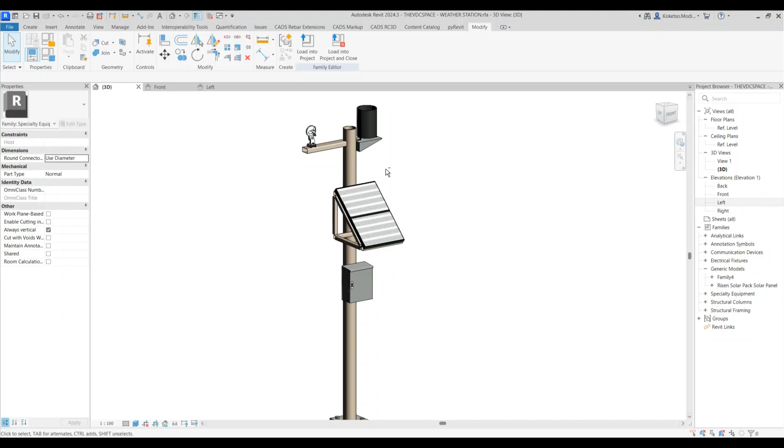Today we're going to be modeling a weather station for a solar PV farm in Revit. The level of detail, we're just going to keep simple, from 200 to 250, and we're just going to include some indicative elements of a weather station for a solar PV farm, such as the junction box, the waterproofing case, the solar panel itself, some mounting structural elements, and also the rain gauge and the weather sensor.

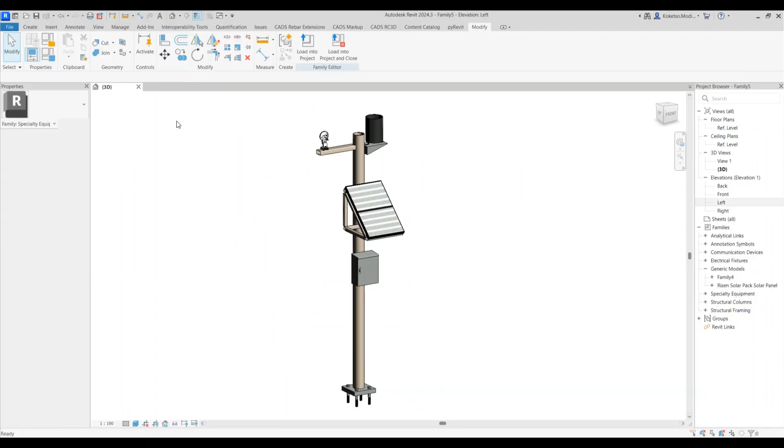Without further ado, let's start with our project. The first thing is I'm just going to create a new family. I'm going to go to new and say family, and then the template I'm going to go with is the metric specialty equipment. I'm going to say open, and let's just close this one down.

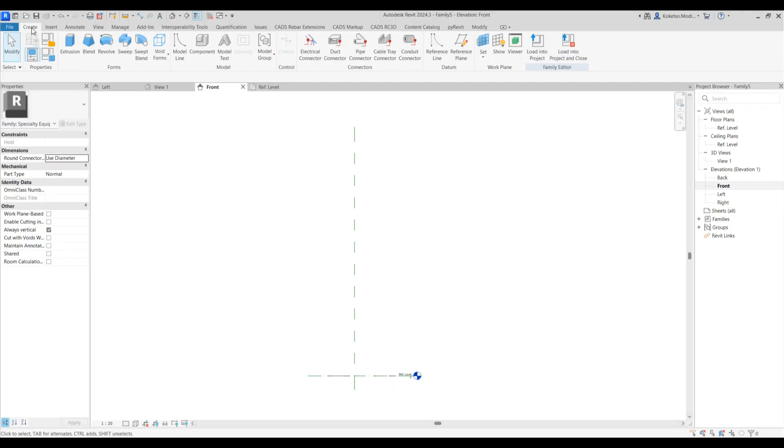The first thing is we're just going to establish our reference planes in order for me to establish where everything is going to be set. I'm going to go to the front elevation, extend this, and then lock it again. Go to create and say reference plane. You're going to place it right on top, then offset it by 1500, select it, copy it further up by 500, and then another one by 1000 millimeters.

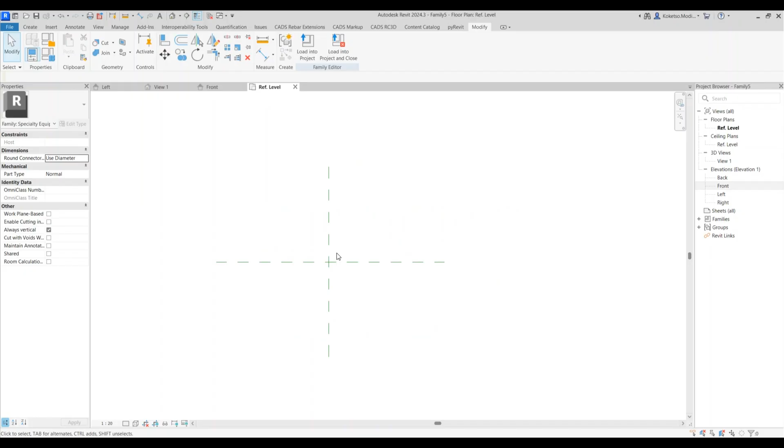The next thing is to nest families into this template. We're going to start with the structural components or the mounts. I'm going to go to insert and say load family, then go to metric library UK, then go to structural columns first, say steel British standards, then go to circular hollow section and say open. The size I'm going to go with is 139.7 by 5, and say okay.

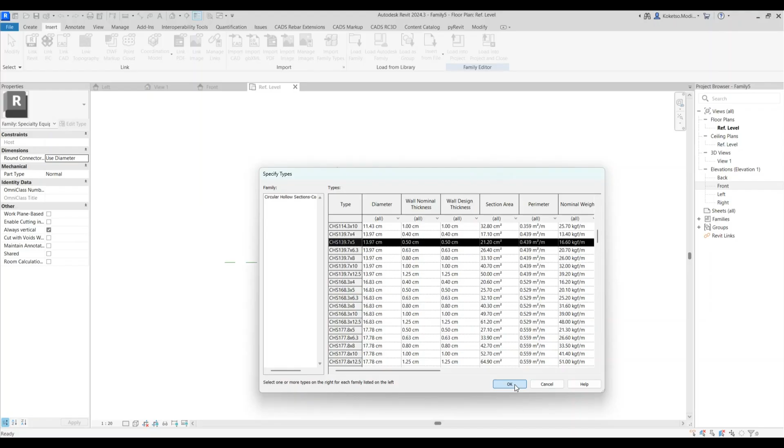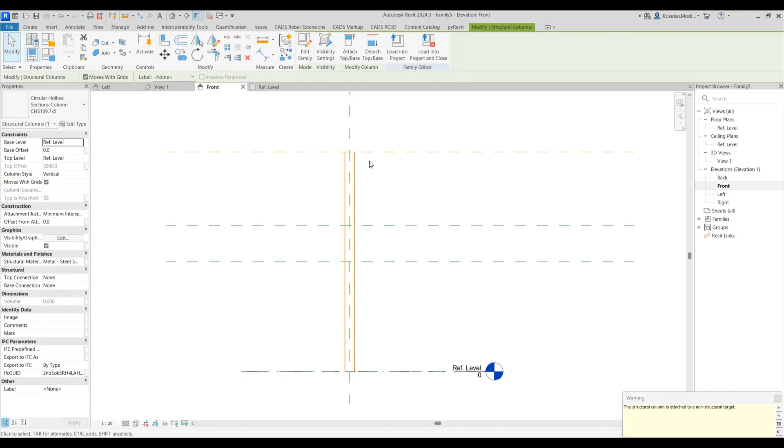Then you're going to go to create and say component, and place your column right there. Make sure you change your level of detail to fine so that you can see the thickness, the outer and the inner diameter. After this, go to the front elevation, change this to fine again, and select it. When you scroll up under modify column, select attach top or base. Make sure your constraints are set to top under attach column, then select your reference plane, and it's going to increase in size.

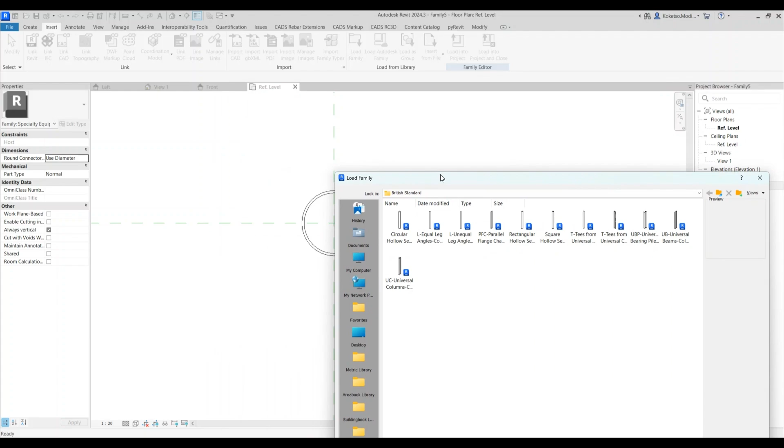After this, the next thing we're going to do is go to the reference level, and the next family I'm going to nest is the junction box. I'm going to go to load family, and by the way, I'm going to leave the link in the description so that you guys can download these families. I'm going to go to where I save my family.

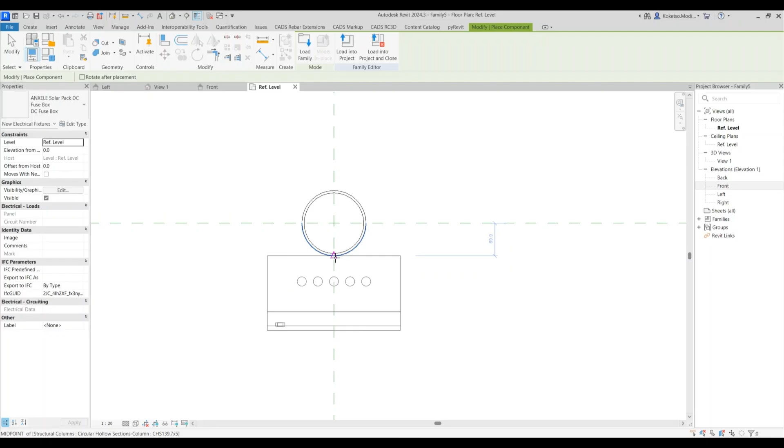There you go. I'm going to load in the family, go to create and say component, and then place it right there. After I place it, I'm going to go to the front elevation, and as you can see, this is where it's set. I'm going to move it right in the middle, and then move it towards this reference plane. If I open up the 3D view, this is what we have so far.

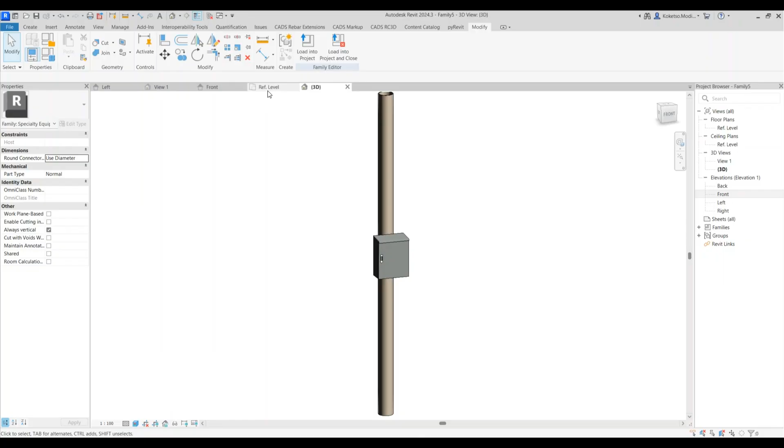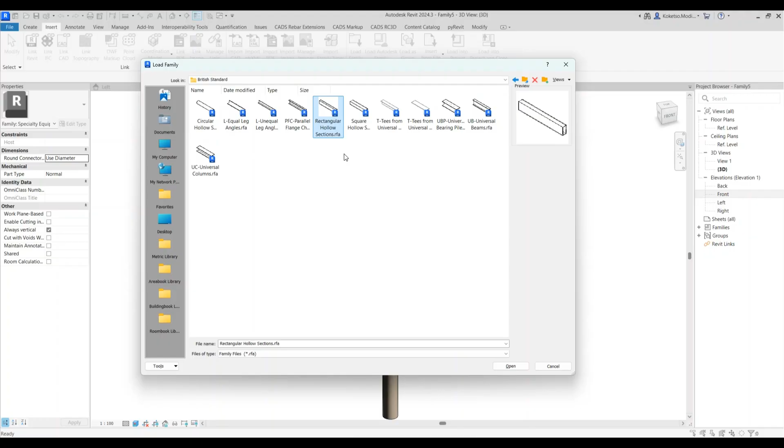The next thing is I'm going to place some structural framing which are going to act as a mount for our solar panel. In order to do that, I'm going to go to insert and say load family, then go to metric library UK content and say structural framing, go to steel, then British standards, and choose the square hollow section and say open. The size I'm going to go with is the smallest one, which is the 40 by 40 by 2.6, and say open.

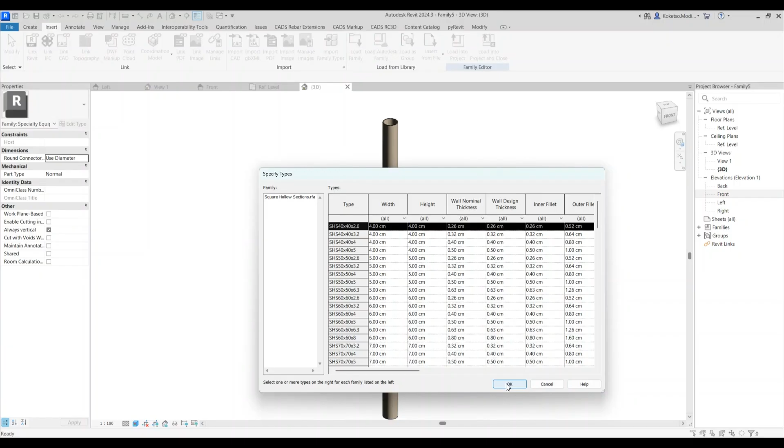So after this, I'm going to go to the left elevation, change this to fine again, and then this is where I'm going to establish my mount for my solar panel. I'm going to go to create and say component, and then I'm just going to start modeling from this point.

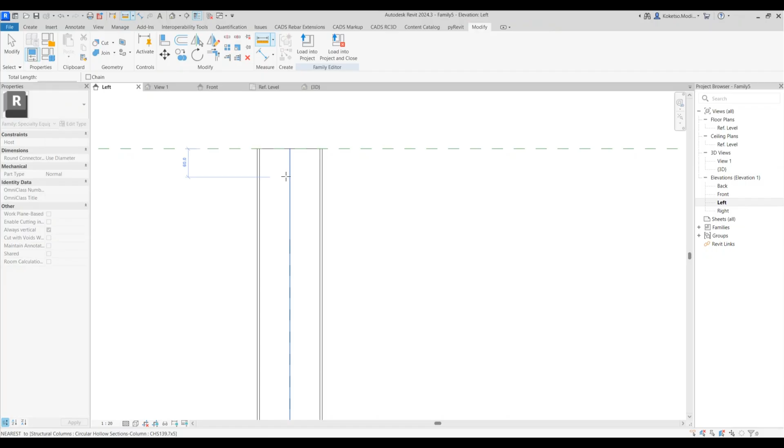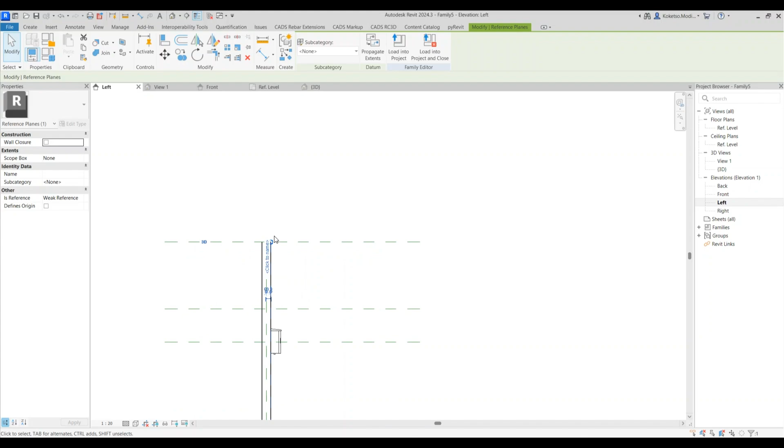So let's just measure this. If I use this, I'm going to measure from there until there. So it's 139.7. So what I'm going to do is establish my reference planes. I'm going to set this to 139.7 divided by 2, which is 69.9. And then I'm going to place some reference planes, which are going to make it easier for me to snap my structural framings for my solar panel mount.

Okay, so if I go to create again and say component, I'm going to start from this point, take it to the right by 500 millimeters, and then I'm going to place another one going to the top and make it 500 also. This one's supposed to be vertical. Why is it slanted? Okay, let's just align.

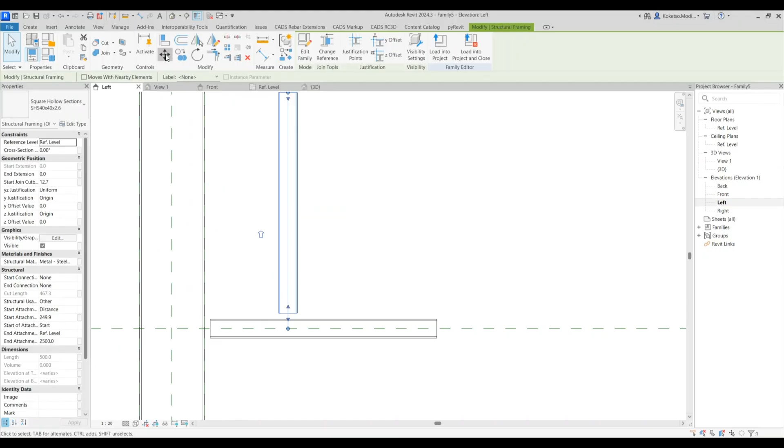So I'm going to align it like that and unjoin. Actually, let's do this. I'm going to place it randomly there and make it 500, select it, and then I'm just going to move it from this point towards that point. Okay, why is it slanted like that? Let's adjust it.

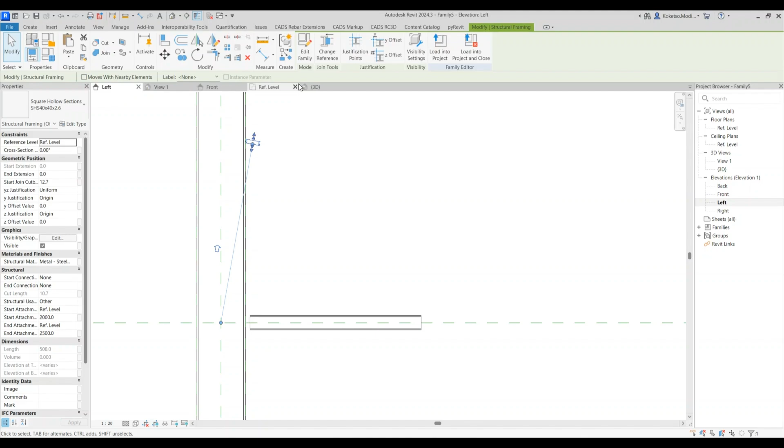Let's see, I'm going to move it again, and then it becomes okay, it's fine. I know what to do.

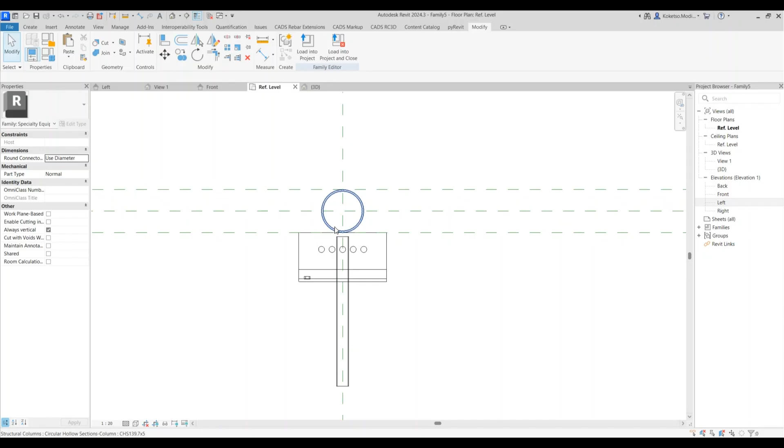So I'm just gonna go to the front, the left elevation, and then let's place another one which is diagonal. So I'm gonna start from this point. Actually, let's go to, I'm gonna place some reference planes.

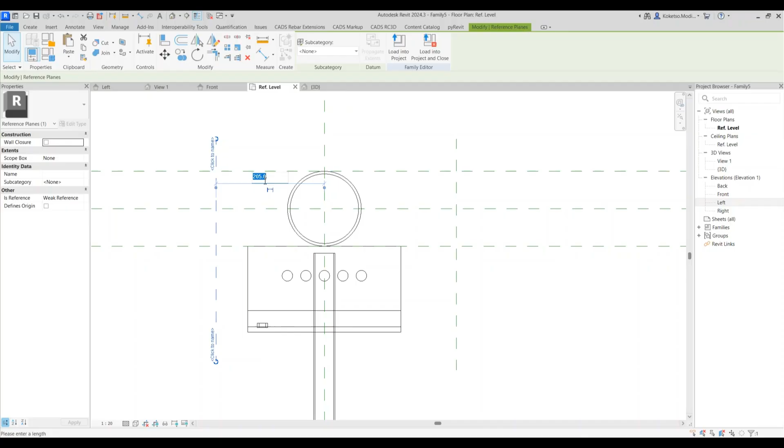So I'm on the reference level on the floor plan. I'm gonna place reference planes, one on each side. And then this one I'm gonna offset by, let's say 250, and then another one by 250. Okay, so I'm gonna name this one L, and then this one I'm gonna rename it R.

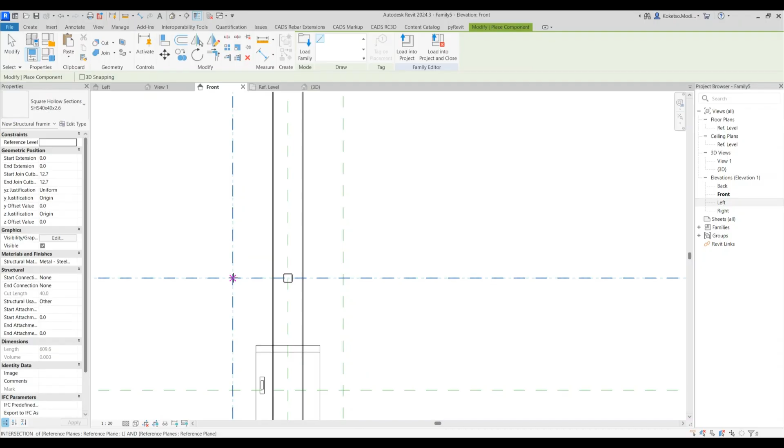So if I go to the front elevation, I'm gonna say create and say component, and then this is my L. So I'm gonna place this structural framing at 500, and then another one by 500 this side.

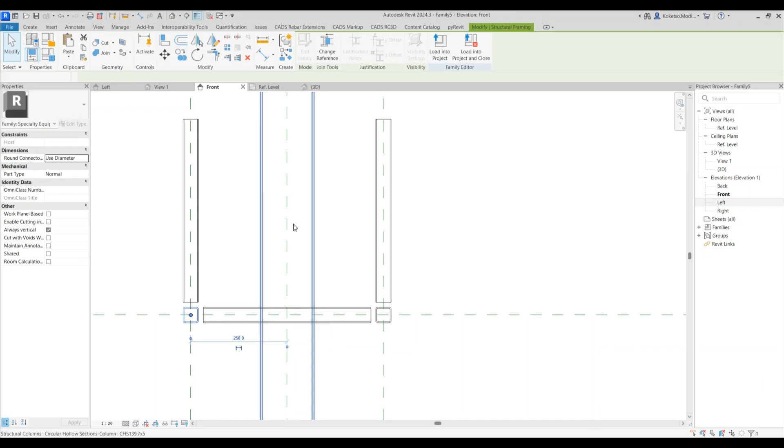I'm gonna place another one like that, and then I'm gonna move this one towards this reference plane and join, and then while it's still selected, mirror it towards the other side. So this is essentially how it looks.

So this one, I'm gonna have to nudge it. I'm gonna go to the left elevation. Let's select these three. So I'm gonna go to the left, and then I'm just gonna nudge it towards that point. Perfect. So this is how it looks.

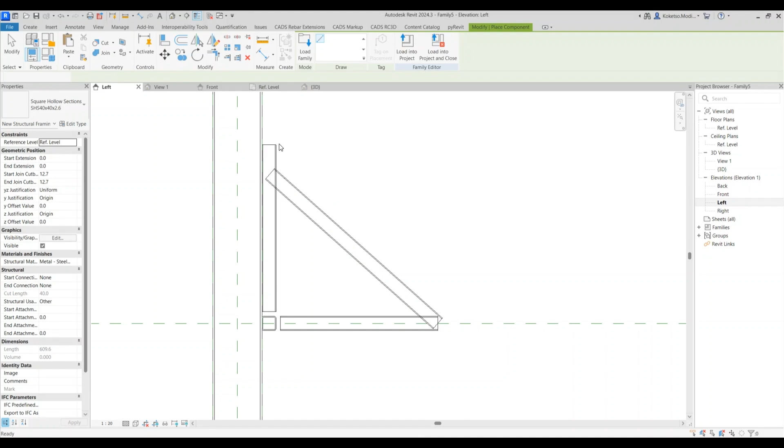So I'm going to go back to the left elevation and say create and say component. I'm going to place a diagonal one, which is going to be running like that. No, undo, from that point and then towards that point. Okay, so let's see how it looks.

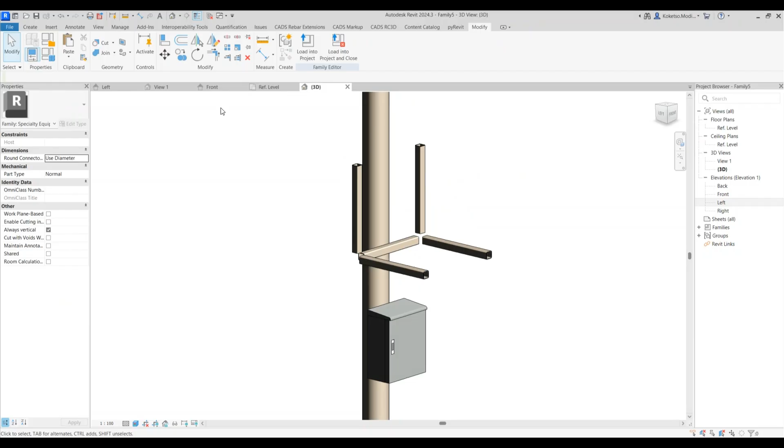I'm going to select it, go to the front elevation, and then obviously I'm just going to move it towards this point and join it, and then mirror it towards the other side, and then it's going to refine itself like this. So let me just remove this, go to the left and say component.

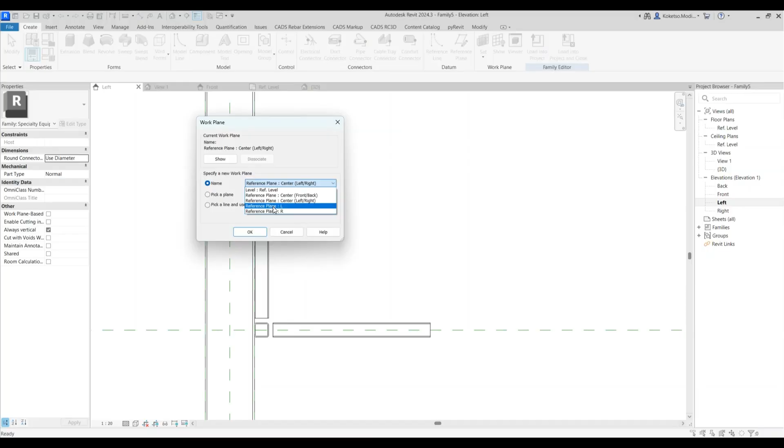And I'm going to set my reference, so it's going to reference, okay. Let's say set. I'm going to set my reference plane to reference plane L and say OK, component, and then I'm just going to place it like that. Okay, perfect. So I'm going to select it, go to the front elevation, and then let's mirror this towards the other side. So if I go to 3D view, this is how it looks.

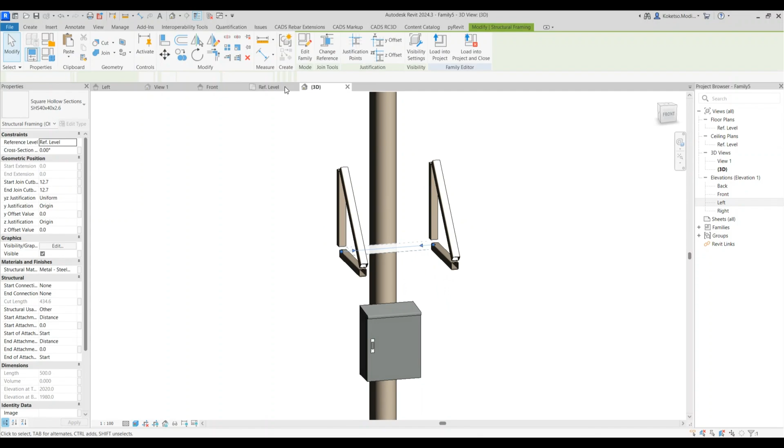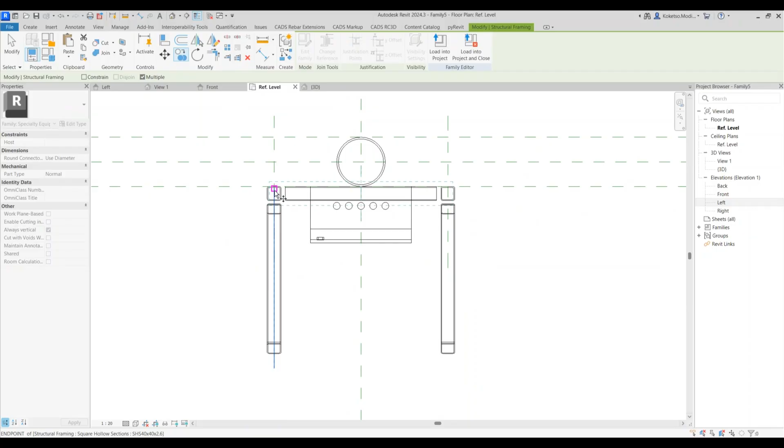Okay, so this one, I'm just going to copy, select it, go to the front elevation, and then I'm just going to copy it towards the top and place it like that. Okay, so after this, this one I'm going to select, go to the reference level, and then I'm just going to copy from this point and then towards that point.

All right, so the next thing is to place our solar panel. For me, I'm just going to load in the one I downloaded from BIMobject. I'll leave a link in the description, like I said, and I'm just going to refine this one a little bit.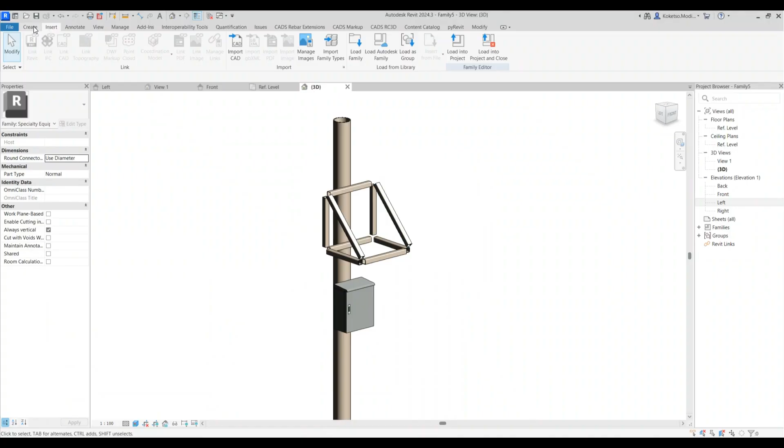If I go to component, I'm just gonna randomly place it, select it, and say edit family. If I go to the reference level, I'm gonna assign the parameters that the owner has assigned towards the dimension. So this is gonna be depth, and this one is gonna be width. No, actually this one is width, and this one is depth.

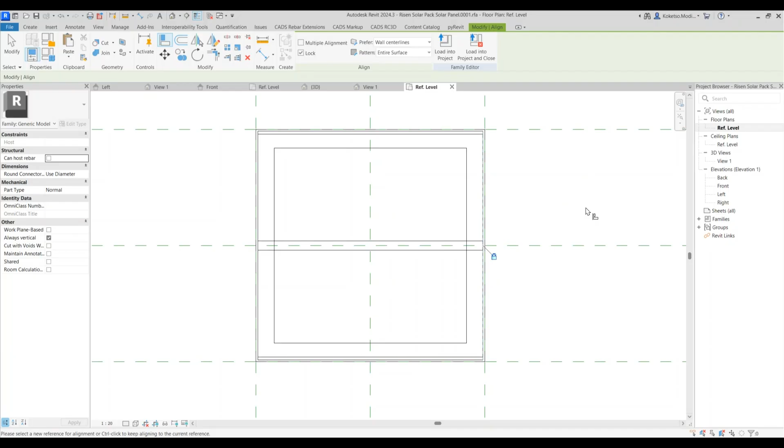I'm just gonna change the width to 500, press enter, and then the depth also to 500 and press enter. As you can see the width hasn't changed, so I'm gonna press AL for align. I'm gonna align it towards the inside, align this one first, then align this extrusion second. If I open up the 3D, this is how it looks.

The next thing is I'm just gonna say work plane based, check this, and then uncheck always vertical, and then I'm just gonna load it back into our family.

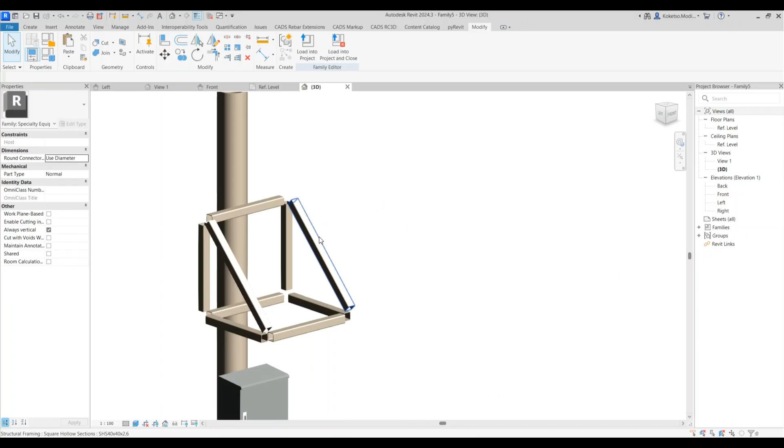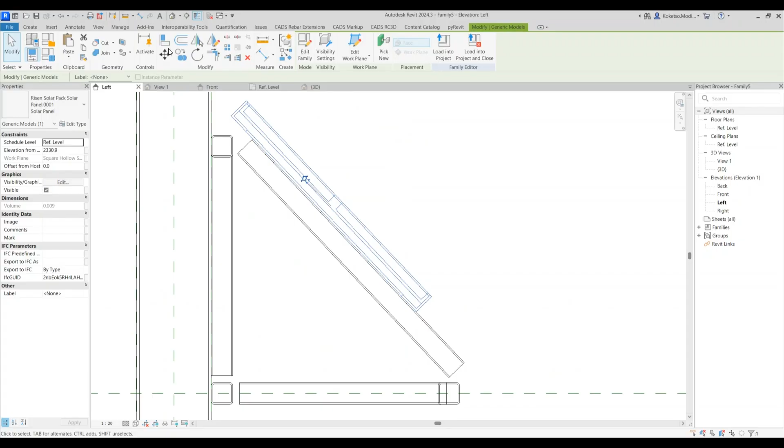I'm gonna deselect it and say create component, make sure placement is set to place on face, then select this face of your structural framing. Place it like that, and when you go to the front elevation, you can manually adjust it. Then in the left elevation, you can perfectly adjust it right in the middle. So this is how it looks.

So the next thing is I'm just gonna create a base plate. I'm gonna go to the floor plan, the reference level, go to create and say extrusion, and place a random rectangle like this.

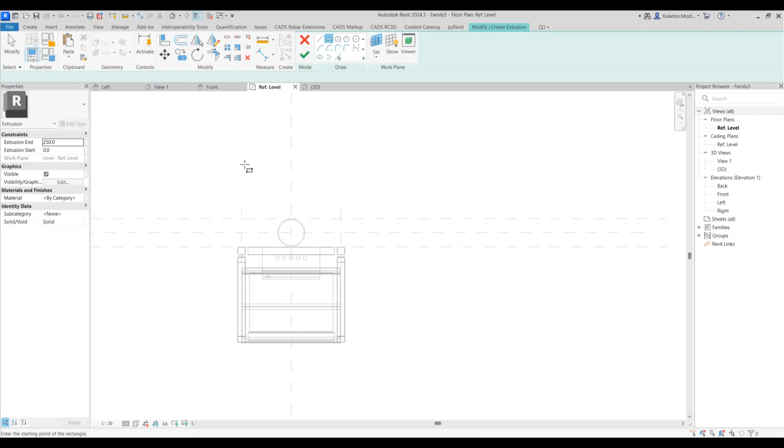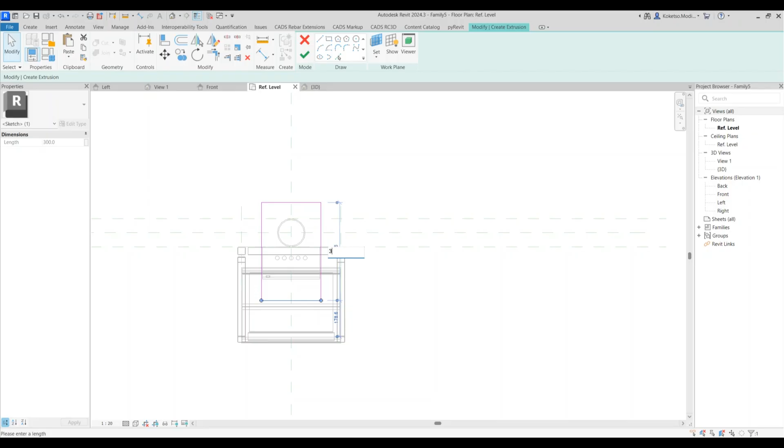This rectangle, I'm just gonna offset it perfectly from each side. On this side, I'm gonna make it 150, so essentially it's gonna be 300 by 300. This one, I'm gonna make it 150, and let's make it 300. Say finish, go to the front elevation, and drag this down, place it like that. Then the thickness of this, I'm just gonna make it 10.

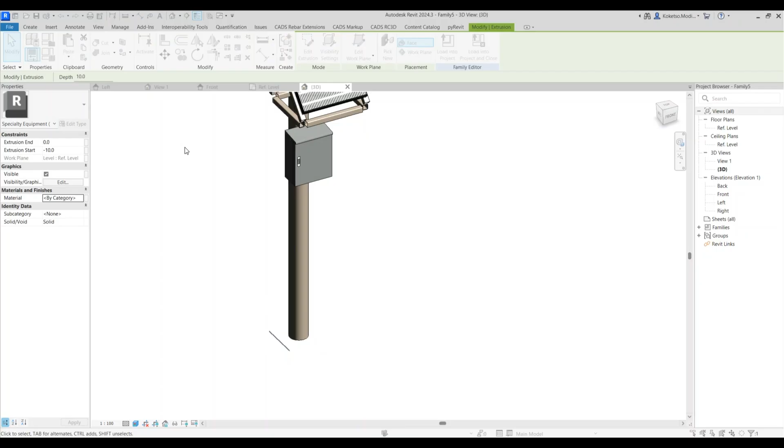Go to the 3D view. The next thing is I'm just gonna place some bolts, but before that, let's assign a material. I'm just gonna make this one steel or metal. I'll go with metal and say apply, and then okay.

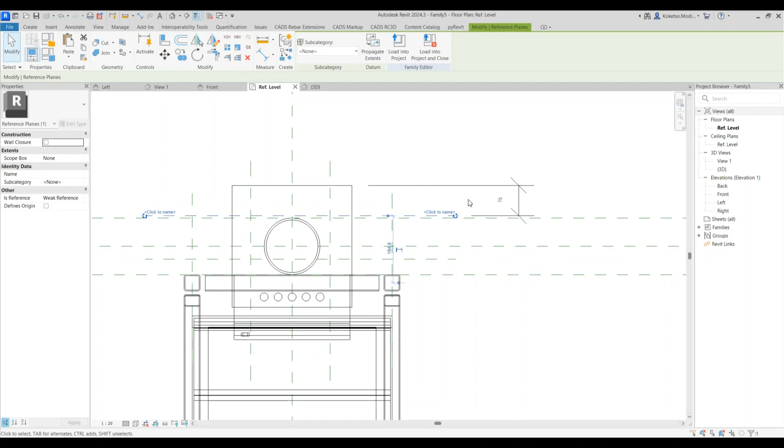The next thing, I'm just going to load in some bolts that we created in previous tutorials. But before that, let's place some reference planes like that, so it's easier to place the bolts. Let's offset this one from the outside by, let's see, 75 - no, actually 50 is fine. And then this one also, let's offset it by 50.

I'm just gonna remove these ones because we're no longer using them. This one I'm gonna offset by 50, and then this side also, I'm gonna offset by 50.

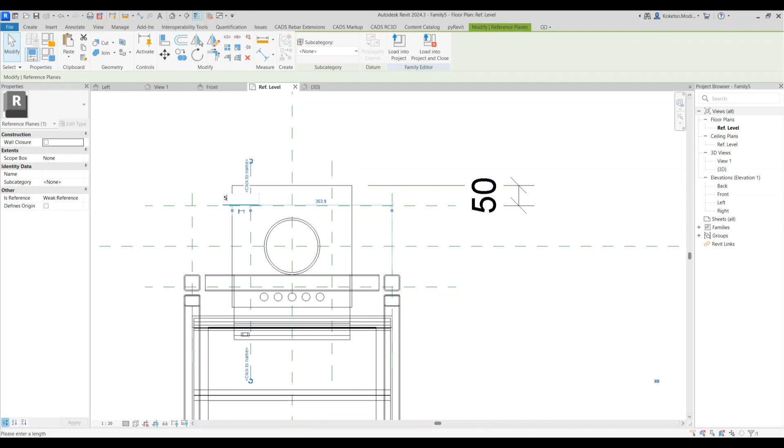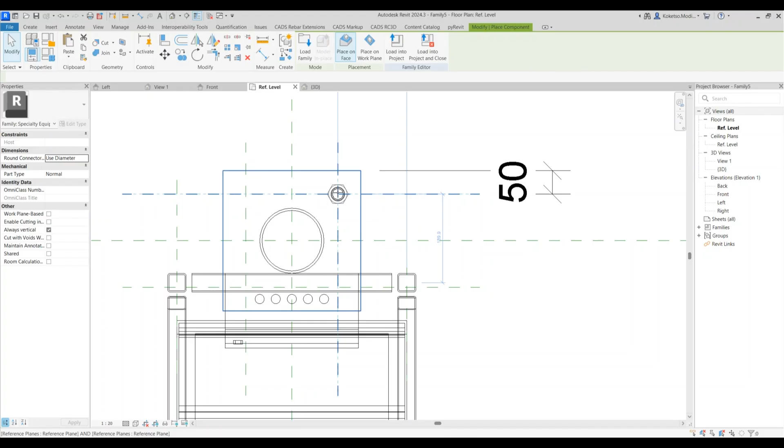The next thing is I'm just gonna load in my bolt family that I've created. Remember the tutorial of the elastomeric bearing - just refer to that tutorial, that's where you can generate that bolt family. After opening it, I'm gonna go to component and place my bolts where the reference planes intersect. After that, I'm just gonna select all of them and nudge it down, placing it perfectly on top of our base plate.

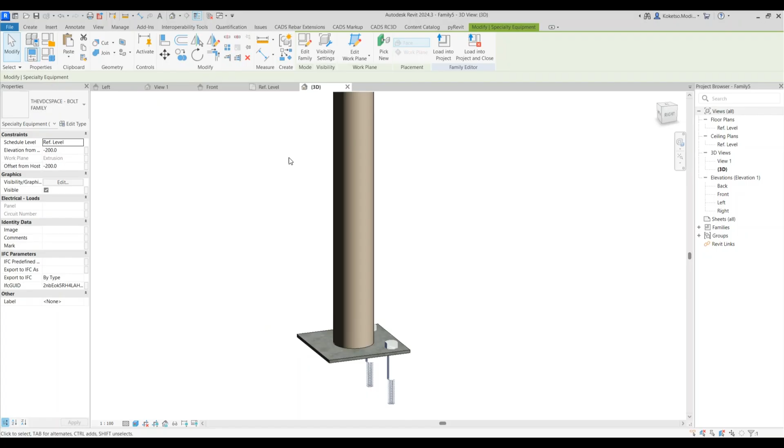These ones, I'm sure they're at the top. Let's select them and then nudge it perfectly like that. All right, so this is how it looks.

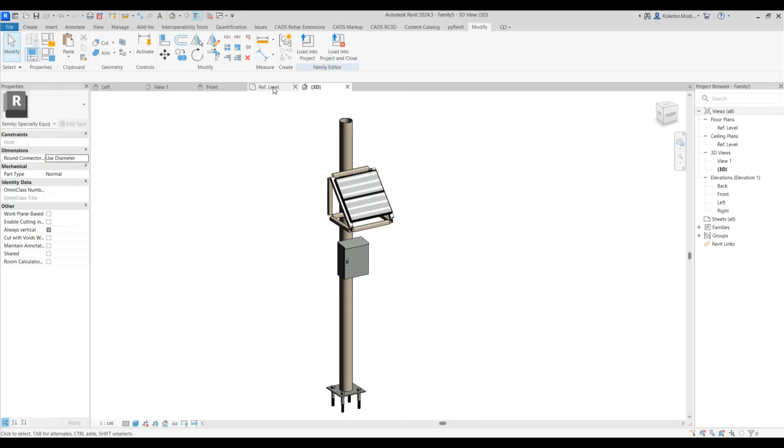So the next thing is we're gonna place another structural framing at the top. I'm gonna go to Insert and say Load Family, go to the metric library, UK contents, and say structural framing, steel, British standards, rectangular hollow section, and say Open.

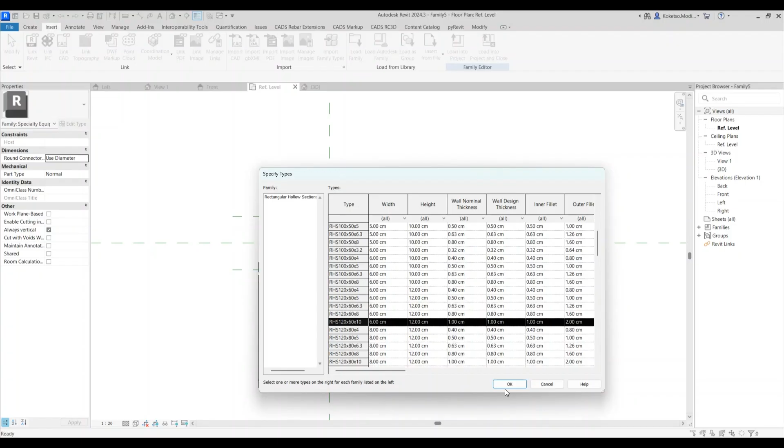The size I'm gonna go with for this one is 120 by 60 by 10, and say Open. Create and say component. I'm just gonna place it right on this side and then offset it by 500 mils. Go to the 3D view, and then if I select it, I'm gonna go to the cross section and change the cross section to 90.

And then I'm gonna select it, go to the reference level, and then I'm just gonna nudge it back to its position perfectly like that.

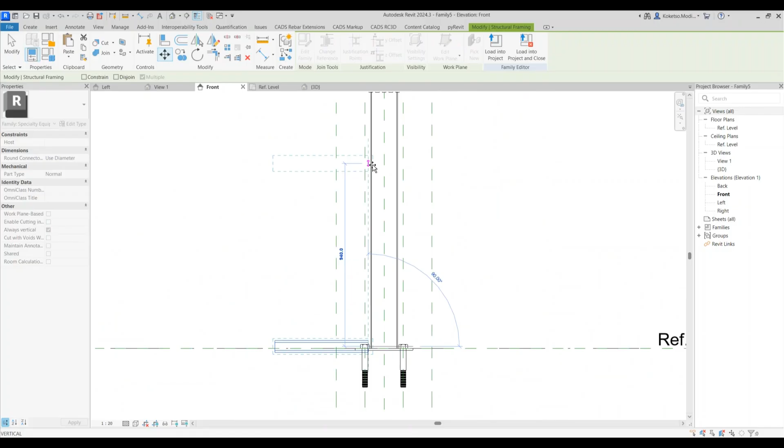And then if you go to the front elevation, because it's a beam, you're going to have to adjust it. So I'm going to punch in random numbers for the start level offset and end level offset so that I can just move it freely towards the correct position at the top. So I'm going to place it like that.

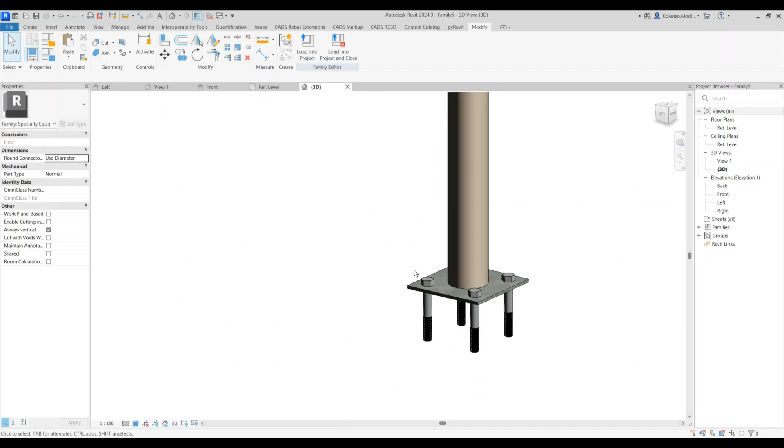And then I'm just going to move this by another 100 mils. And then this one, I think it's fine right there. So the next thing is let's just close this down and then open it again.

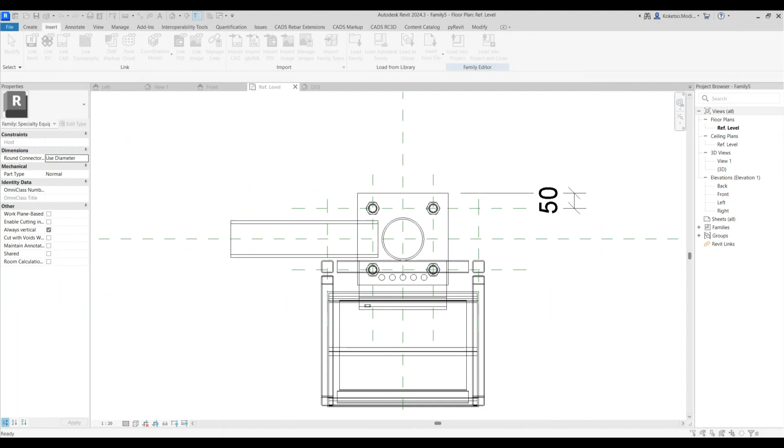So the next stage is to place our weather sensor. This one also I've got it from BIM objects, so I'll leave the link in the description so that you guys can download that. It's the weather sensor. I'm gonna say Open.

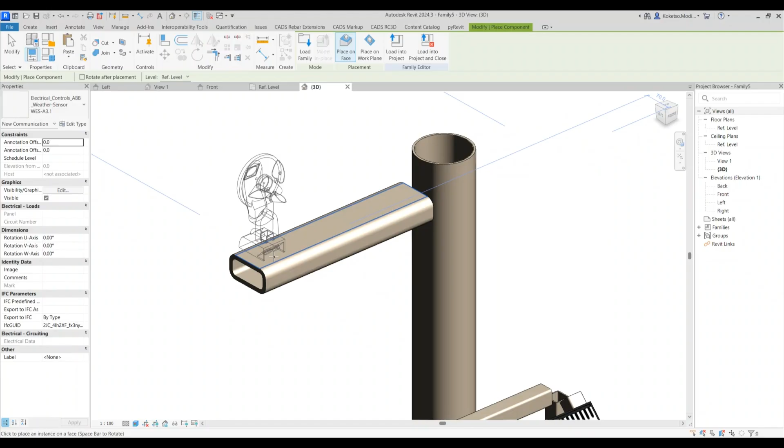So I'm gonna go to create and say component. And then this is also face based, so if I scroll and hover over the top of this structural framing, it's gonna allow me to place it on top like that. So I'm gonna place it like that. And if you go to the left elevation, you can just nudge it perfectly so that it can be placed perfectly on top of your structural framing.

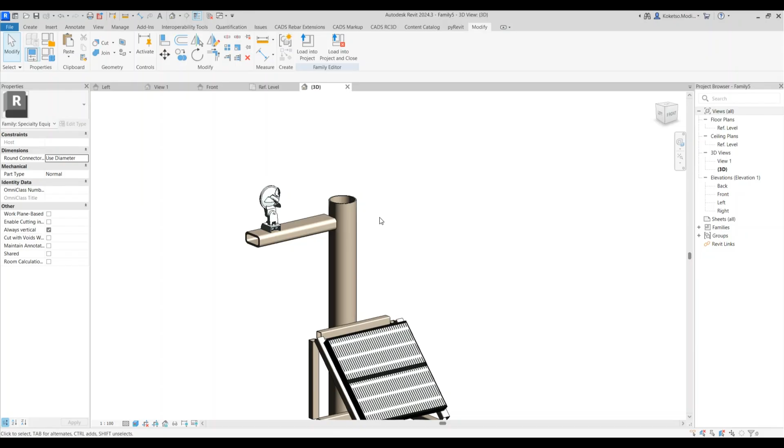So the next step is to create a steel plate so that you can place your rain gauge on top of that. But for that, I'm not gonna create it as a separate family, I'm just gonna create it right inside this template. So before that, let's just create a rain gauge, a simple one, as a separate family.

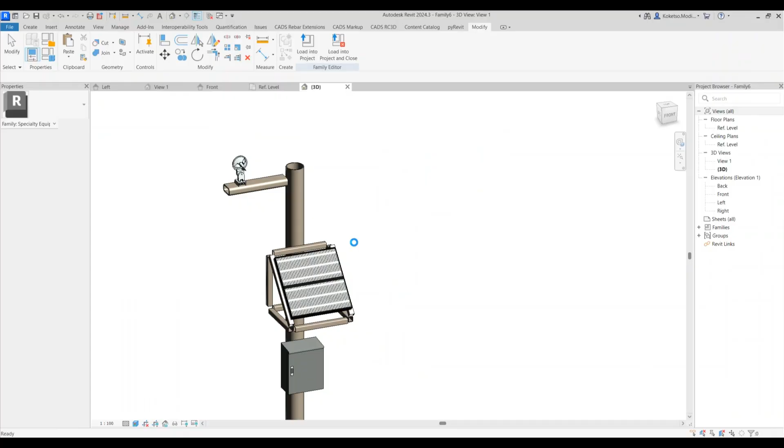I'm gonna go to Family, and actually I'm gonna create the plates inside this family also. So for our rain gauge, I'm gonna say extrusion circle. So I'm gonna place it right in the middle.

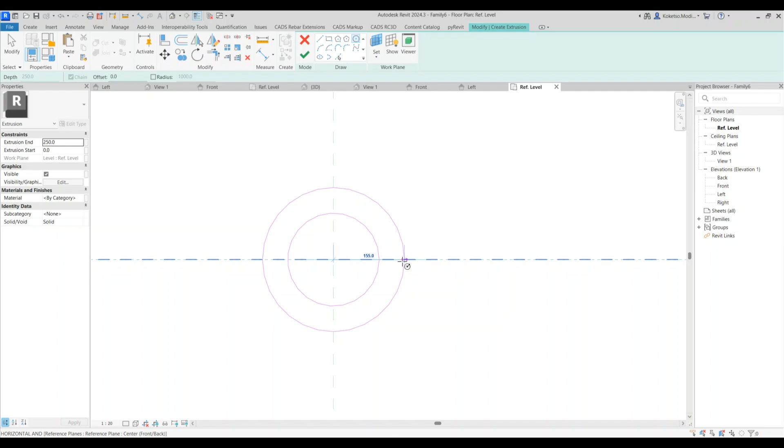And then the size of this, I'm just gonna make it 100, and then the outer diameter I'm gonna make it 105. And then I'm gonna say finish, go to the front elevation. And then I'm just gonna drag this towards the top. And then I'm just gonna measure this gap, select the bottom of this so that I can nudge it and adjust it and make it 30.

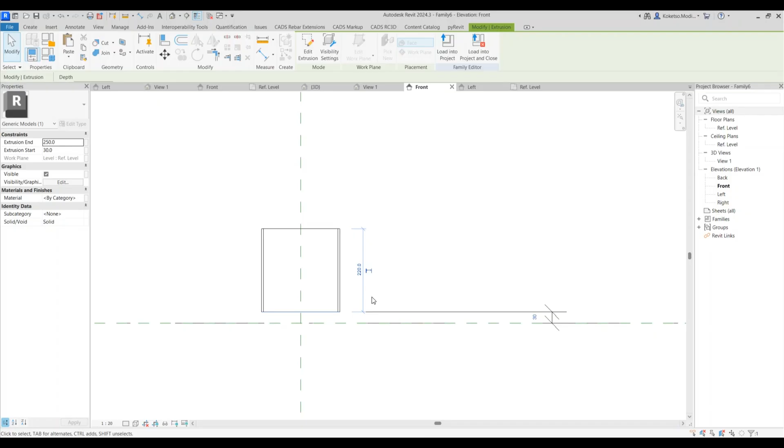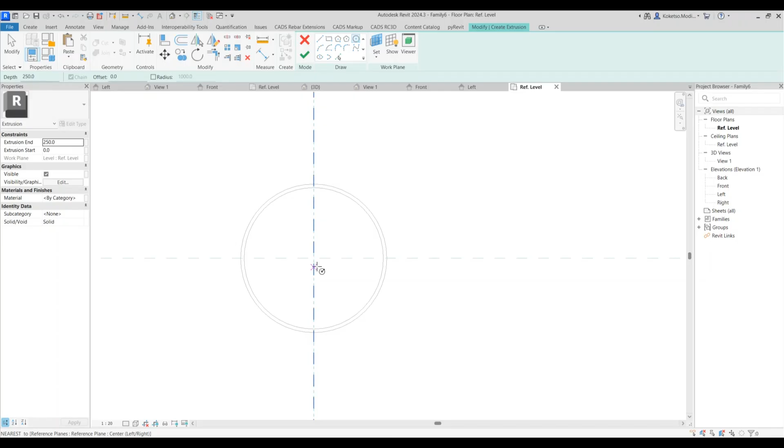So the entire depth of this, I'm gonna make it 250, and then remove these. So I'm just gonna add the base of this steel cylinder. I'm gonna go to extrusion and then place another one right in the middle like that, which is gonna be a solid, and say finish, go to the front elevation.

And then I'm just gonna drag this towards the bottom. So the thickness, I'm gonna make it 10. And then I'm just gonna drag this towards the top of this. So let's just join the geometry. Yeah, that's perfect. So the next thing is to create some supports which are going to be supporting this small little cylindrical shape.

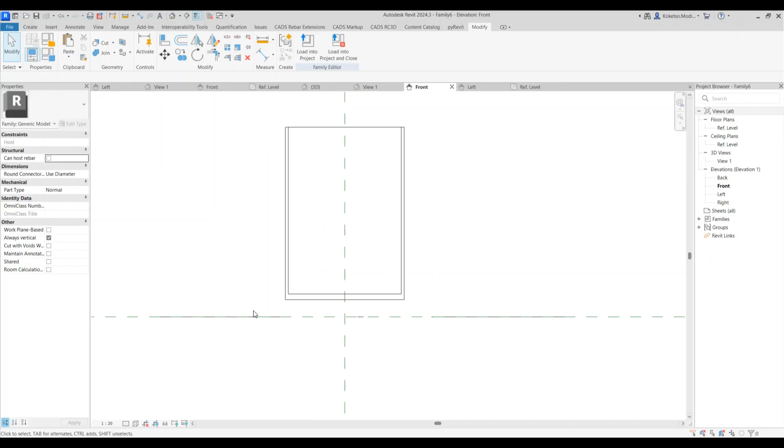So I'm going to go to sweep and say sketch path. I'm going to offset it by 80, place it like that, at an L shape.

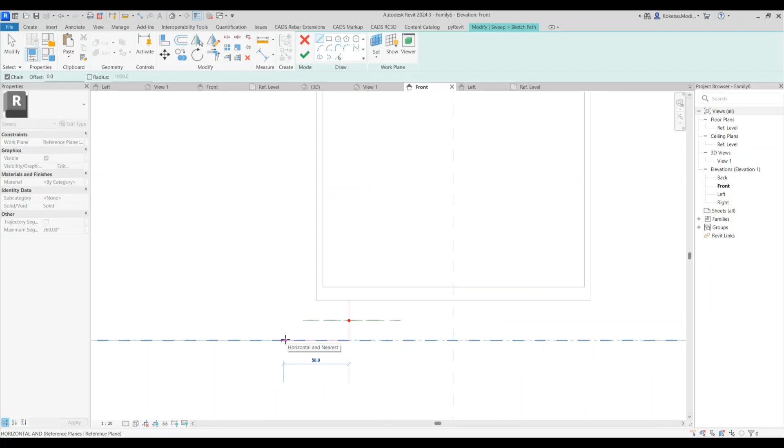So it's going to be going down by 30 and then to the left by 50 mils. Say finish, edit profile, go to the reference level of the floor plan, and then you're going to place a rectangle like that. And then this rectangle, you're going to offset to make it 10 millimeter thickness, and then on each side offset by 25, and then it's going to be 50.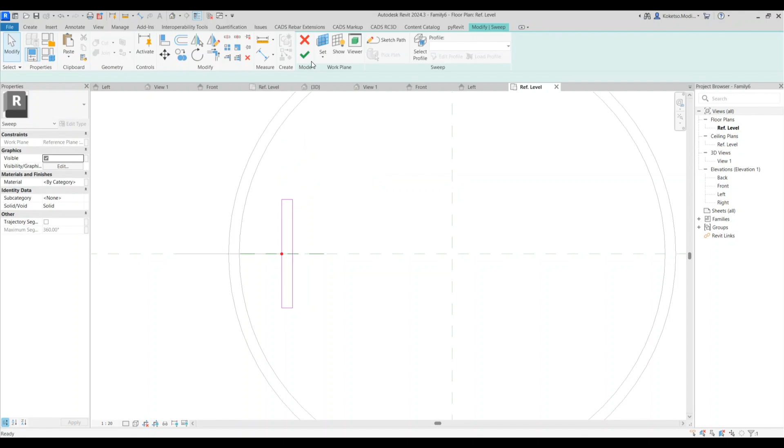Okay, let's reduce the thickness and make it 5. Say finish, finish, open up the 3D view, and this is how it looks.

So I'm going to select it, go to the front elevation, and then mirror it towards the other side. After this, I'm going to go to the 3D view, select all of these, and then just change the material to aluminum, load in aluminum, apply, and then okay.

So after this, I'm gonna go to the reference level, and then I'm just gonna add a plate extrusion. I'm gonna place my plate like that, and then from that point, I'm gonna offset by 50.

Actually, let's make it 150, that's fine. And then from there, let's make it, I think 315 is fine.

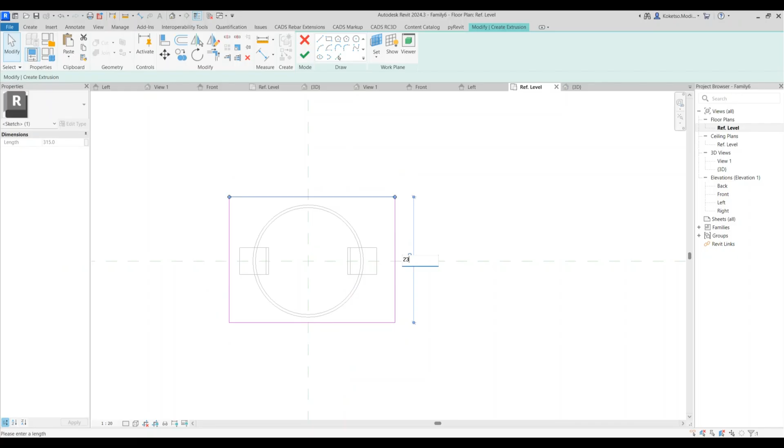And then I'm just gonna nudge this one. Let's make it 115 this side, it's fine. And then it's gonna be 230 in total. Right, so I'm gonna say finish.

Go to the front elevation. I'm gonna drag this down towards the bottom of our supports. And then the thickness of this, I'm just gonna make it 10. And then I'm gonna place another one.

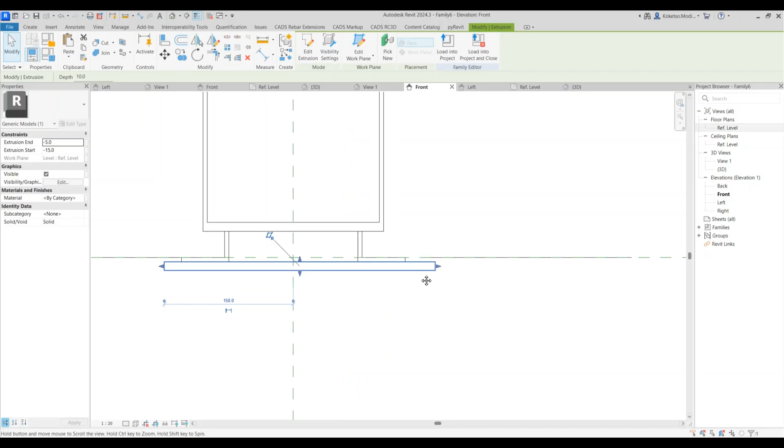Actually, let's see, this is the front. So I'm gonna rotate this. Let's actually, no, yeah it's fine. So I'm gonna go to the front elevation and say create, and say extrusion.

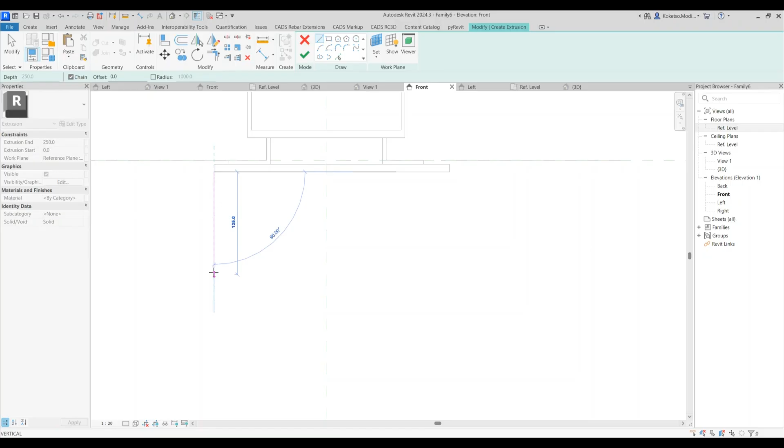So I'm gonna place other plates which are running diagonal like this. I'm gonna make it 150 going down. And then I'm gonna place another one, which is gonna be running like this, and say finish. Then the thickness of this, I'm gonna make it 10.

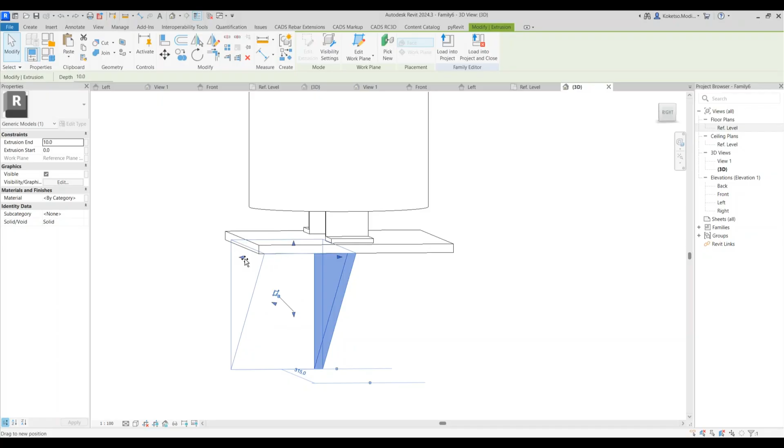Go to the 3D view. Let's just drag it towards, say undo. Let's just drag it towards this end. And then the thickness, we're gonna make it 10.

Select it, go to the reference level, let's mirror it towards the other side. So I'm gonna change this to realistic and then select these 3 extrusions and change the material to aluminum. So I'm gonna have to add another one.

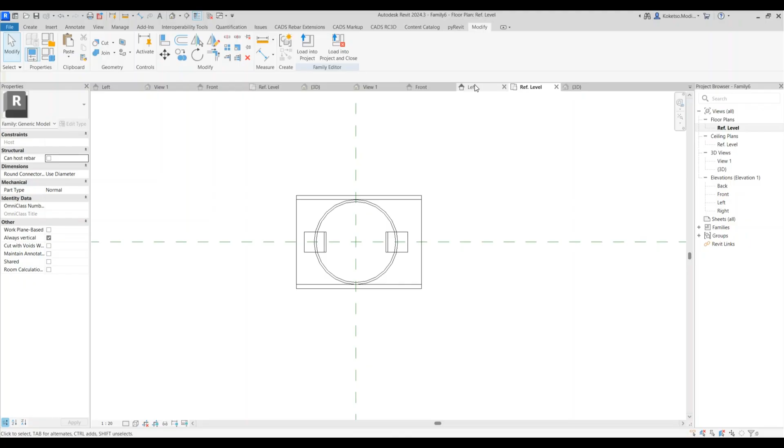So let's go to the left elevation, actually the front elevation. So this one is gonna be running down like that. Let's make it 5 millimeter in thickness, place it like that, say finish.

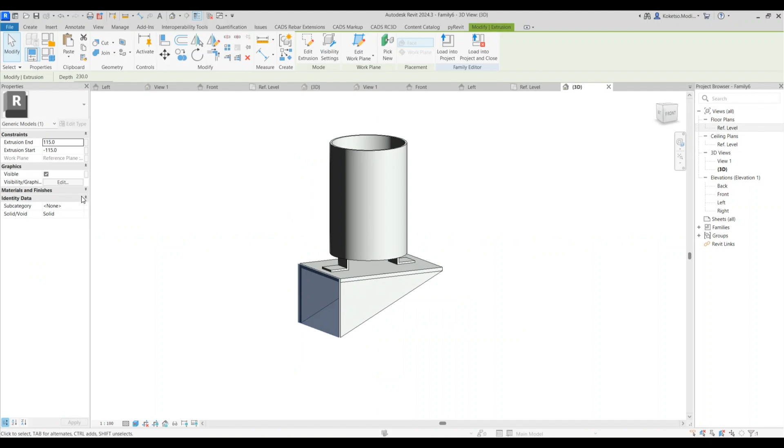Go to the reference level, let's drag it towards that side, and then let's drag this one towards that side. Select it and then change, okay, or we can just say join.

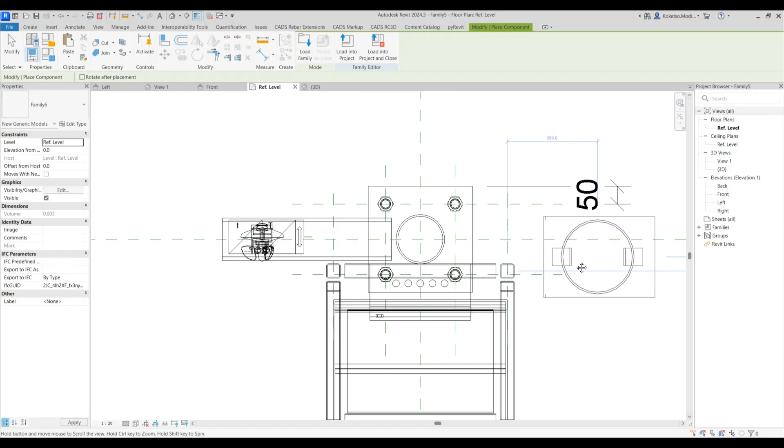Perfect, so I'm gonna load it in. Let's make it shared, and then you guys can name it rain gauge. So I'm just gonna load it in. I already saved this family, so if you want the file, you can get it from my Patreon.

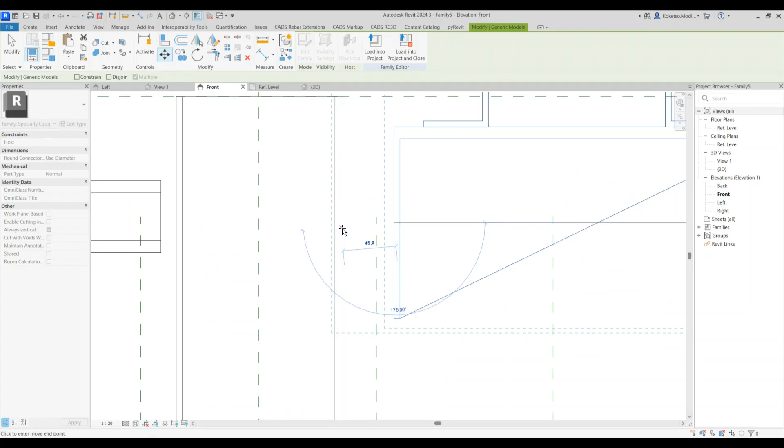So I'm gonna place it like that. Go to the front elevation, and then I'm just gonna drag it onto the top towards the appropriate position. I'm gonna place it right there, and obviously I'm just gonna nudge it so that it interacts well with our steel column. This one also you can nudge and place perfectly like that, and go to the 3D view, and this is what we have.

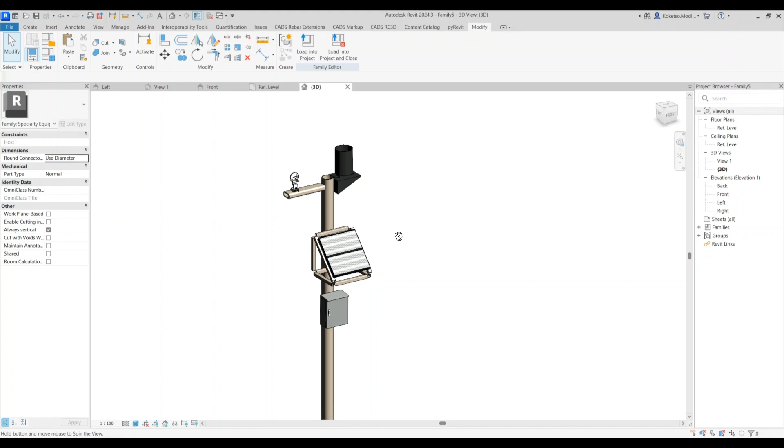So yeah, that's it. I tried to replicate something I'm seeing on one of the companies that produce one of these. But like I said, the level of detail we were gonna keep it simple, LOD 200 to 250. But yeah, I think on the upcoming tutorials we can take it much further than that.

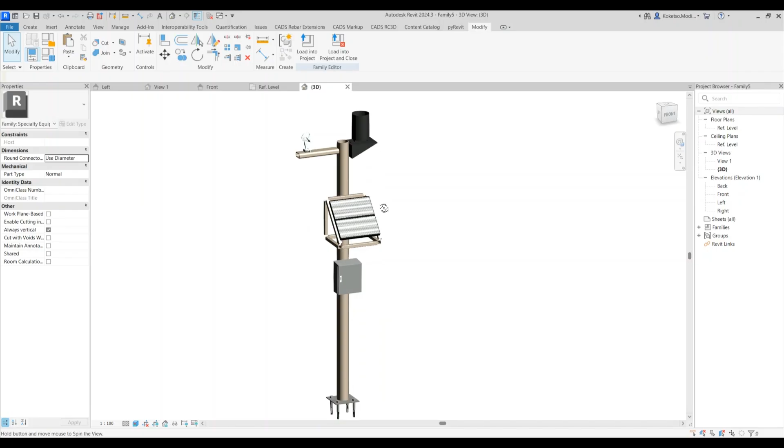But thank you guys for watching, and I hope you guys can implement some of the things I'm teaching you on your project. And I hope this was very much an exciting thing to do.